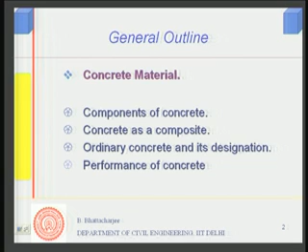So, to start with, we should talk about what is concrete. Now, first of all, let us understand what it is made of.

Ordinary concrete is made by mixing an inorganic material known as cement with water, together with some natural sand or stone dust and natural stones that may be crushed or uncrushed. This is visible in the figure here: this is cement, this is sand, and this is stone or coarse aggregate.

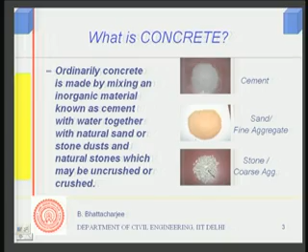Cement, when you add water, it reacts, forming an artificial stone-like structure, a solid hardened mass, and that is what gives us the cementing property as far as concrete is concerned.

But since cement is the costliest of all the materials in concrete, we should restrict its use. Besides, there are some other associated problems like shrinkage, etc. So, bulk of the material in the concrete system is formed by the aggregates, and cement and water, or cementing material of a similar kind, are used as binder material to bind this skeleton material, that is the aggregates. So, aggregates are bound together by the cement in the concrete system.

So, that is what concrete is. In other words, it can be said to be an artificial stone made up of stones, sand, and a binding material. This common binding material is cement and water.

So, the components of concrete therefore are cement and water, which react together and bind the aggregate. The aggregates are nothing but sand and stones.

But this is not all. The modern concrete system also uses some sort of admixtures, as we call them, additional materials or construction chemicals, which when added to the cement system actually improve its properties. So there are other ingredients in addition to these four that I have mentioned.

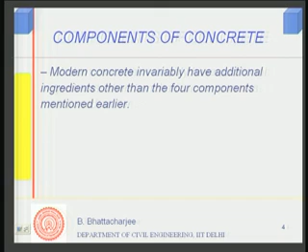The two varieties of those types are: number one, chemical admixtures, which could be accelerators. Now, I mentioned that cement reacts with water, forming a stone-like material, and when you also put sand and aggregate into it, they bind together to form a system of hardened mass that we call concrete.

Now, cement and water, as they react, this is not instantaneous. This prolongs over a very long period of time. Initially the reaction rate is relatively fast, but then it slows down, though it continues to react over a long period of time. So I may like to enhance this rate of reaction, and that is what I do using what is called accelerators.

The process of cement mixing with water and solidification of the same, we call setting. That is, when I add cement to water and also maybe sand, aggregate, etc., initially they are in a sort of semi-liquid form, or I may call it plastic form, plastic state.

That means if you apply some force, it will deform on its own. Liquid, of course, if you apply force, will simply move, simply flow. Plastic is one which will deform. So plastic is a semi-liquid or semi-solid form, in between the two.

So from this initial state, the cement, water, aggregate mixture is in plastic state. Then it gradually solidifies into a solid, and that is what we call setting. So it sets to a solid, then it starts hardening and finally hardens to a strong mass.

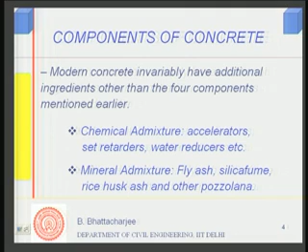So in totality, the most common materials in concrete production would be cement and water together with sand and aggregate - sand and stones which we call together as aggregate - and then some admixtures which could be chemical admixtures or mineral admixtures. This forms the ingredients of modern concrete. Cement, water, sand and aggregate form mostly ordinary concrete, but in modern concretes, even ordinary ones, mineral admixtures are almost an essential part. In high strength concrete systems, they will definitely be present. We will define high strength concrete sometime later on.

The most commonly used cement, we call it Portland cement. It was patented in 1824 in England, and since it mixes with water and hardens, we call it hydraulic cement. That means there are other kinds of cementing materials which may not use water. So hydraulic cement is of this kind.

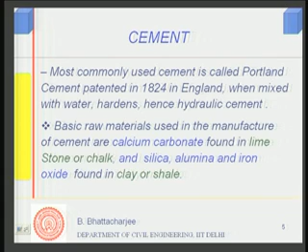How is this material produced? Basic raw materials used in the manufacture of cement are calcium carbonate, usually found in limestone or chalk, and the other chemical inorganic oxides that go into the composition of cement are silica, alumina and iron oxide, found in clay or shale. So the material present in cements are mainly oxides of calcium, silicon oxide, aluminum oxide, iron oxide and alkalis, etc.

The raw materials are limestone and clay, or minerals rich in lime and rich in silica and alumina. These materials are burnt together at a temperature of about 1400 degrees centigrade to form what is known as clinker, which is a solid solution of these minerals forming different cement compounds. We will talk about the cement compounds at an appropriate time, but right now we can understand that cement is manufactured by burning lime and clay together to form a solid solution, and this product formed is called clinker.

The clinker is ground further and mixed with a little bit of gypsum, around 5%, to control its setting properties. When we intergrind clinker and 5% gypsum together, we get what is known as ordinary Portland cement. The name has been derived from a stone called Portland stone that was discovered in the beginning, followed by the patenting of the cement as a material.

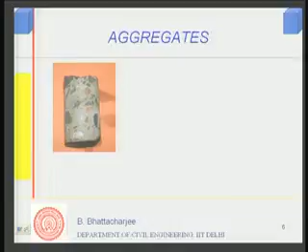The second component in concrete is aggregate, which forms the skeleton. These aggregates are nothing but stone, natural stone, either broken down or crushed to form the right sizes required for making concrete, or they can be rounded stones as available naturally, such as gravel. So they are naturally available, but most often we use crushed aggregate depending upon availability.

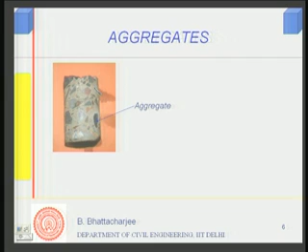Since they form the skeleton in concrete, you can see the stones, something like this. This is part of the stone, so they are the aggregates. This is a piece of hardened concrete core taken from a hardened concrete, and we can see this is the stone piece, that is the aggregate - this is the aggregate, even this is the aggregate, this itself is the aggregate. This aggregate is placed or embedded in the mortar matrix, which contains sand and cement. So the mortar matrix is here, and this is the coarse aggregate.

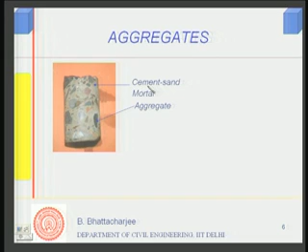In fact, the mortar matrix is the larger matrix in which these are embedded but closely spaced. The cement sand mortar again contains sand as inclusions in a cement paste - cement and water that forms into a paste or hardened paste matrix. So that is what hardened concrete will look like.

This aggregate forms the bulk of the material, about 60 to 75% by volume, and 25 to 40% is paste, but still some voids are left, about 1 to 2%. The bulk of the material is paste, the bulk of the material is aggregate, and that is what imparts the major properties.

They should be strong. Strength is imparted by aggregate, but it is also important to have good strength between the aggregate and mortar interface, as strength is governed by the weakest link in the system. So the aggregate-mortar interface is important from a strength point of view. However, if the aggregate itself is weak, the concrete cannot be strong. So the strength of aggregate is important.

Also, it should be inert, meaning it should not react with the environment present and thereby deteriorate with time. It should remain inert from the environment, because after all, concrete as a material will be exposed to environment, and there it may come in contact with various aggressive chemicals. For example, concrete put in a marine environment in the sea will come in contact with magnesium sulfate, calcium sulfate, sodium chloride, etc., and various other materials. Some of these materials can react with the concrete system.

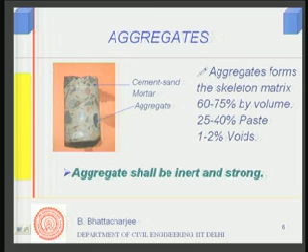So, in deteriorating in the process, it can deteriorate. The aggregate should be such that it is inert, and does not react with most of the material present in the surrounding environment. So the characteristics of the aggregate should be strong and it should be inert - should not react with the surrounding material. That is how it can provide durable concrete. So that is the role of aggregate.

Now, I mentioned earlier that modern concrete always has some other kind of admixtures together with the basic materials, that is cement, water, sand, and the larger stones, which together we call aggregate. Chemical admixtures are used for enhancing the properties of concrete, or sometimes we call it performance. Performance is defined in terms of various properties - how it should perform functionally when it is exposed during its service condition to environment. So it depends upon certain properties, and therefore, to enhance certain properties or its performance, we use chemical admixtures.

What are those chemical admixtures? Some of them we will be discussing later in some of our later lectures. Mineral admixtures, as I mentioned, like fly ash and silica fume, are used for improvement of long-term strength and durability performance.

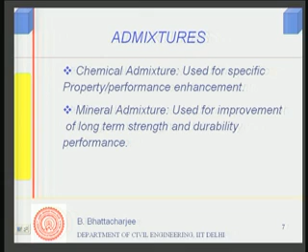Historically speaking, when concrete was actually developed as a material and its scientific studies started being conducted, somewhere around the beginning or early part of the last century, around 1925, researchers were mostly bothered about its strength properties, strength characteristics. Later on they found that one has to look into its durability properties also.

But by the early 50s, the strength of concrete was fairly low. It was rarely exceeding anything more than 50 megapascal compressive strength. But with the advent of chemical admixtures, this property could be enhanced.

Further, mineral admixtures and chemical admixtures together opened up the avenues of improving the strength of concrete. Modern high strength concrete, or very high strength cement based composites, have become possible only due to the use of mineral admixtures as well as chemical admixtures. Using these admixtures together, high strength and high performance concrete materials can be designed.

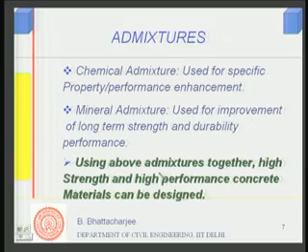So what we see is that concrete as a material can be obtained at normal ordinary strength or at high strength using various kinds of admixtures. Therefore, all this gives us certain advantages of concrete.

First of all, ordinary concrete, since it uses stones and a major volume of it is actually stones and naturally available sand or crushed stones, it is cheap, giving it a low cost of production. Cement is the costliest material amongst all of it, but cement paste, as we have seen, occupies only 25 to a maximum of about 40% in some special concrete.

Rest all is naturally available material, therefore it is cheap to produce. Since it is durable, I can make a durable material out of concrete, so its maintenance cost also is likely to be lower. Putting these two together, concrete has a low initial cost and low maintenance cost, giving it a low life cycle cost during its service life.

Then, we prepare concrete ourselves by adding cement and water. So cement, water, aggregate etc., initially it is in a plastic state and I can mold it into any shape. Since I start from the plastic state of the material, I can produce it at any place I like, and cast it into any shape, which may not be possible for many other materials.

So therefore, concrete has got a lot of advantages, although it has got some disadvantages, we can take care of it by various means. Thus, it is the most popular construction material all over the world today, particularly in a country like India.

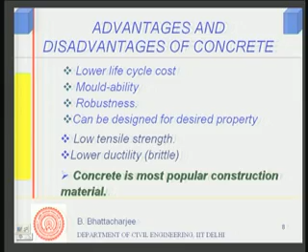So this is by and large what I talked about so far, related to ordinary concrete, and I mentioned that I can make a very high strength material out of it, what we call as high strength concrete. However, concrete system today, one can call possibly a cement based composite system today, is very versatile, and you can get very high strength material using this hydraulic cement and water and some sort of aggregate system.

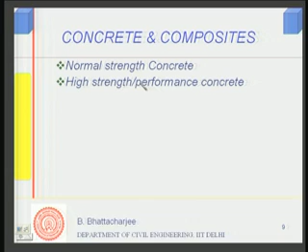So overall concrete can be thought of as a composite today. So that is why we may say concrete and other composites. This includes materials like normal strength concrete, high strength or high performance concrete, something called ultra high strength concrete, then something called fiber reinforced concrete, something called densified with small particle - I will define one by one a little bit - then something called macro defect free matrix, reactive powder concrete, polymer concrete, and polymer cement concrete.

So if we see concrete and the related composite system today, there are so many classes of material. Normal strength concrete is the one which I have been just talking about, that is, you have cement, water, sand and aggregates giving us strength of the order of about 50 MPa, 60 MPa and not beyond.

Then I can enhance the strength of the concrete by using mineral and chemical admixtures beyond 60 MPa, as we shall define, and I can produce what is called high strength concrete system and/or high performance concrete by using various kinds of admixtures. And then I can make concrete of much higher strength, which I call ultra high strength concrete. Now, since these materials are all brittle, I can introduce fiber to improve its ductility and resistance against impact, etc.

And I get a material called fiber reinforced concrete. So in this material I actually reinforce the concrete with various kinds of discrete fiber.

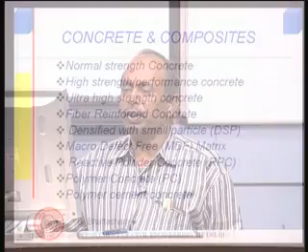In addition, hydraulic cement binder concrete is one variety of concrete. Suppose I remove the hydraulic cement and water as a binder and replace it with a polymer, then I get what is known as polymer concrete. This material is used very much for repair works today. In some cases I remove only part of the cement binder but use a polymer and also part cement for binding, and this is also a repair material called polymer cement concrete.

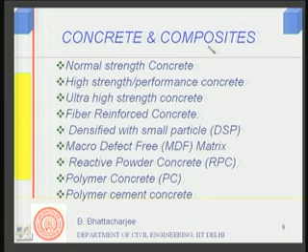So if I look at the concrete and concrete composite system today, that includes normal strength concrete, high strength or high performance concrete, ultra high strength concrete, fiber reinforced concrete, densified with small particle, macro defect free matrix, reactive powder concrete, polymer concrete, and polymer cement concrete. These are all materials which can be called concrete or cement based composite materials. You can see that strength varies over a wide range, their various properties vary over a wide range, and therefore they can be designed and used for specific purposes.

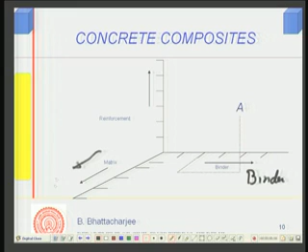So I can represent this material in a 3-dimensional matrix. For example, this axis represents a binder, this axis represents matrix, and this represents some sort of reinforcement - I am talking of fiber reinforcement here, not conventional reinforcement. So this 3-dimensional representation of this generalized material, cement and cement based composites, can be drawn like this.

I will have some binder which could be cement and water - OPC, ordinary Portland cement and water - or some pozzolanic cement and water, as I mentioned, what is Portland pozzolana cement and so on, some sort of hydraulic cement and water, that would form the binder. Or it can be polymer, as I mentioned in the previous slide, or polymer cement. So there can be varieties of binders.

The matrix can form simply of aggregates of large stones and small sand, or crushed stones and crushed stone powder as sand. So there can be various possibilities of using in matrix, or I may not have large size stones at all, but only quartz sand, and then some sort of reinforcement. Those are normally in the form of fibers, say steel fibers, polypropylene fibers, carbon fibers, etc. So there can be various combinations of these binders, matrix and reinforcement forming a material.

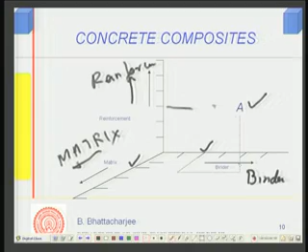Depending upon the property I need or desire for its functional performance in the actual structure, I can choose the binder, matrix and reinforcement. For example, if I need high ductility, I can choose a reinforcement. If I do not need ductility, or I'm getting ductility from some other source like conventional reinforcement, I may not use a fiber. The matrix could depend on what type of material is available or what strength I require - for very high strength material, I do not use large size aggregate. Cement binders or polymer binders depend upon usage; for example, for repair work I might use a polymer as a binder, polymer concrete, say epoxy concrete. So epoxy as a binder for repair work, because it will depend upon my usage and the performance I require during its service. So based on this, one can select the material.

So that is what is a material, right.

Now, so far I have talked about concrete and cement composites. Now let us come back to our most common material, that is ordinary concrete.

In general, concrete and cement based composites have a wide range of properties and wide range of application. The most commonly used cement based composite is ordinary concrete, and this ordinary concrete strength ranges less than 60 MPa, as we shall see later on.

But then how do you designate the concrete? All concretes do not have the same property, the same strength. So we designate ordinary concrete by its 28 days standard cube compressive strength. Why 28 days? Cement and water react, and this reaction is not instantaneous, it prolongs over a long time. By about 28 days, about 90% of the reaction is complete, and most of the strength development takes place by then.

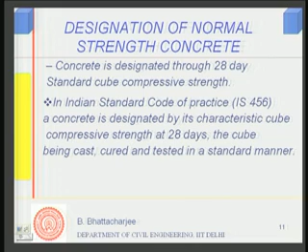So we are talking only of compressive strength because concrete is weak in tension. We talk of compressive strength of concrete, and we test the concrete cube which we make from the concrete, and test at the age of 28 days.

The Indian Standard Code of Practice - I mentioned earlier that civil engineering or construction is a lot more practice based than purely on scientific ideas. So one has to follow codes of practice, and the code relevant for concrete is called Indian Standard 456, its latest version being IS 456 2000. There again we define concrete by its cube compressive strength at 28 days.

The cube has to be cast in a standard manner. We pack it or compact it in a standard manner, then put it in a given condition for 28 days, which we call curing - put it in water for 28 days at a given temperature. So it's cured in a standard manner, and then we test it also in a standard manner, so that the variation we get is because of only the material and not the test condition, curing condition, or casting.

So we test the standard cubes at 28 days, and we designate the concrete by what is known as its characteristic cube compressive strength. What is characteristic cube compressive strength? It means that if I test 100 cubes, 95 of those 100 cubes should show a strength above this value. So that strength I take, which will be exceeded by 95 cubes out of 100 - only 5% of the cubes can show lower strength. That is what we call characteristic strength.

This will become clearer in our subsequent lecture. So we designate a concrete by its 95% characteristic cube strength at the age of 28 days. When I say a concrete is M25 - written as Mix 25 or M25, M30, M20, etc. - I designate concrete as M20, M25, M30, or M40. When I say a concrete is M25, I mean its 28 days characteristic standard cube strength is 25 MPa.

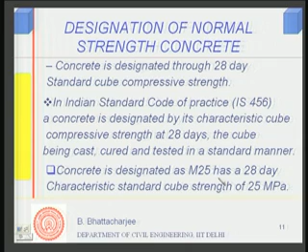I repeat, M25 concrete has a 28 day characteristic standard cube strength of 25 MPa. If it is M30, it will have a 28 days characteristic standard cube strength of 30 MPa, and so on. That is how we designate ordinary concrete. Strength is one criteria, and normal strength concrete is up to 60 MPa. High strength concrete we define as one which has 60 to 120 MPa cube strength, and ultra high strength concrete would be greater than 120 MPa.

Now, strength is one criteria, but since we make concrete in its plastic state and then it hardens, its long term properties are also important - it should be durable. Therefore we talk sometimes in terms of performance of concrete, performance of concrete in its fresh state. When I say fresh state, what could be the performance? That means how easily it is moldable.

If it is very easily moldable, I might say its performance is very good. If it is not so easily moldable, I might say its performance is not as good. However, both have got usage.

For example, a concrete known as roller compacted concrete may not require any moldability. I might need to use a lot of energy to mold it, so high moldability performance may not be a required thing, because roller compacted concrete is relatively dry and compacted using road rollers. So I do not require the property of moldability in such kind of concrete.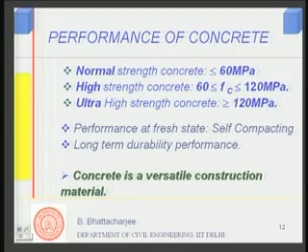So in summary, what we have discussed is concrete as a material, and we have said that its ingredients are natural aggregates, cement or cementitious. Let me highlight cementitious for a moment, because I have talked of cement. Cementitious includes all other pozzolanas which I have mentioned. So its ingredients are natural aggregates, cement or cementitious, and water, and also we have discussed that there are admixtures into it. Then we have looked into concrete composites, the overall composite system, cement based composite and concrete all put together, the whole complete concrete system we have discussed.

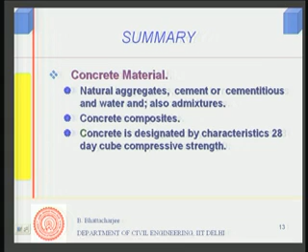And then we have also talked about designation of concrete, how we designate the normal strength concrete. And then lastly we talked about performance of concrete in its fresh state, hardened state and hardening state.

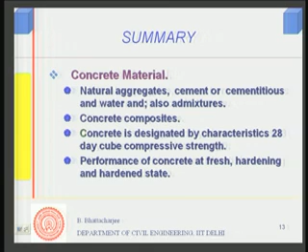So I think with this, concrete as a basic introduction to concrete as a material is complete. Then we can now next look into the process of concrete production, followed by the properties of cement and cement water system and concrete system as a whole, how the strengths develop, how the properties develop, etc. So thank you very much for hearing, and this completes this particular lecture on concrete material as an introduction.